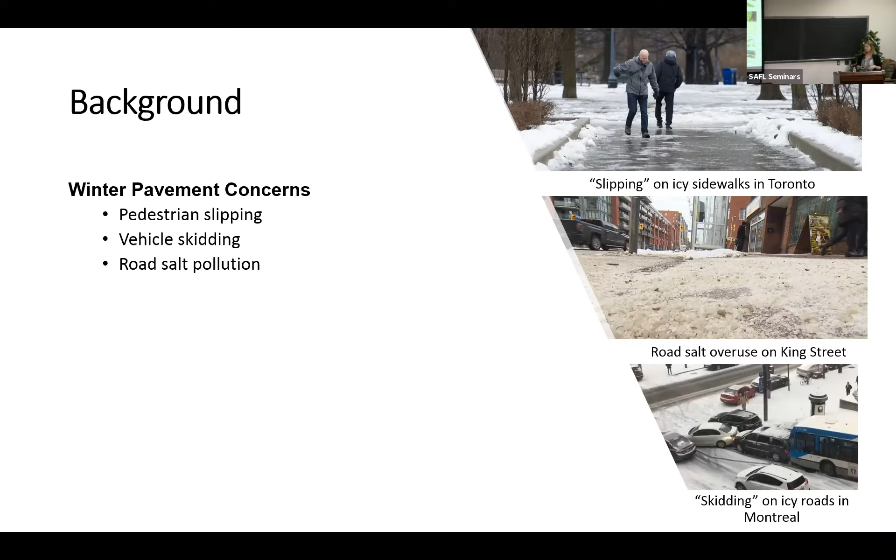The issues that we encounter in the winter all come down basically to the amount of surface friction that we have. In our lab, we have a couple of devices that we can use to measure surface friction. The first one is this called a slip test, or the Mark 3B.

It basically simulates a pedestrian walking, and that angle that your foot hits when you're walking—what's happening is if it's slippery, whoop, you fall. So you can see here the little foot, you adjust the angle, and when you get to the right setting, you actually see it slide, and that would be when the person falls. So you can measure the coefficient of friction.

We also have a SlipAlert, which is by far my favorite toy—it's just a little car. The distance that vehicle travels is going to be a function of the surface friction. So we're simulating in this scenario a vehicle skidding. We have these two devices that we can use on our test pad to measure friction under different winter scenarios.

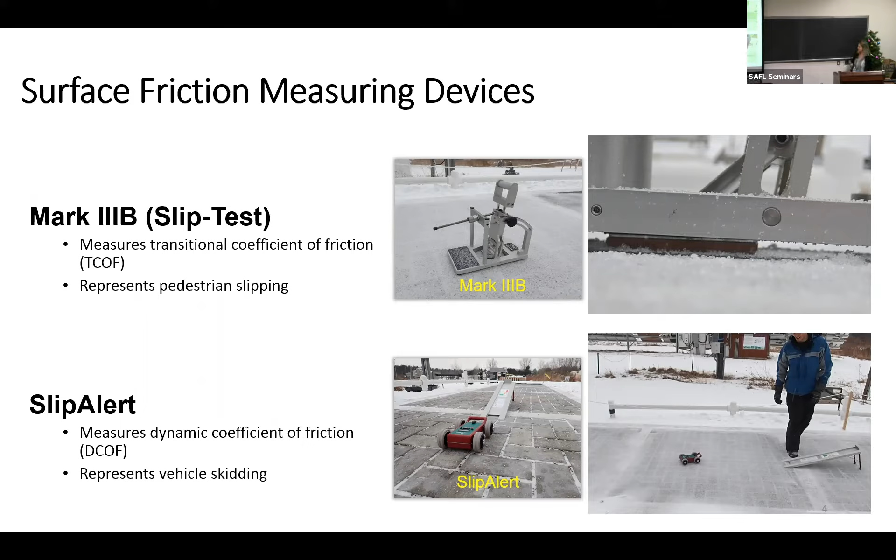Some of you may be familiar with some of these other products. We've tried to work with them in the past. All friction testers are not designed for outdoor applications. They're traditionally meant for testing new types of tile or indoor work environments. So trying to use friction testers outside under snow and ice has been tricky.

The British pendulum is a very common one, but we personally just found it much too time consuming to get it set up when you're outside and it's cold. And then we've also played around with a T2GO friction tester, but ran into issues. This is used often in looking at the friction of airport traffic lanes. But if you have snow, we've run into lots of issues with snow accumulating on those rubber tires, which then was affecting our friction measurements.

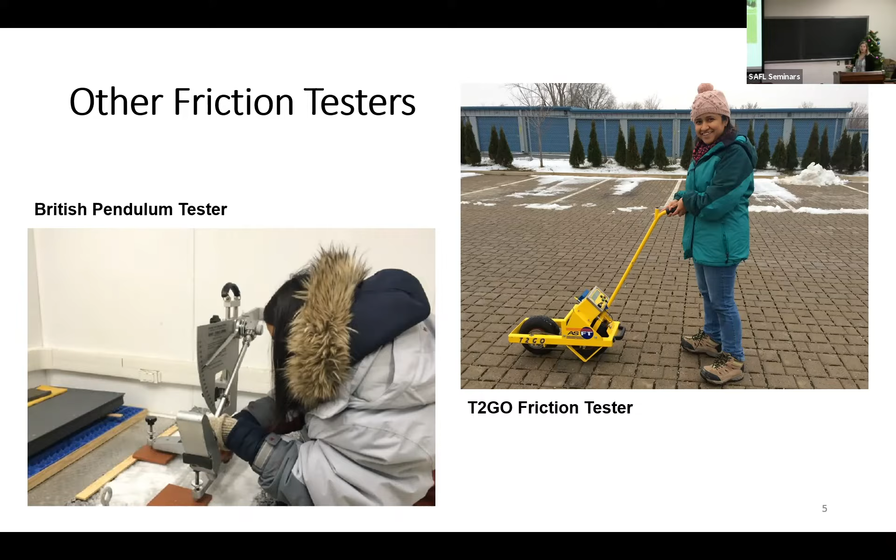Over the past 2 winters, we've been testing or measuring friction on a test pad north of our city, about an hour away, on some permeable pavements. So this is our little research facility. We've got 4 PICP cells that are identical and an asphalt control that's drained by a catch basin.

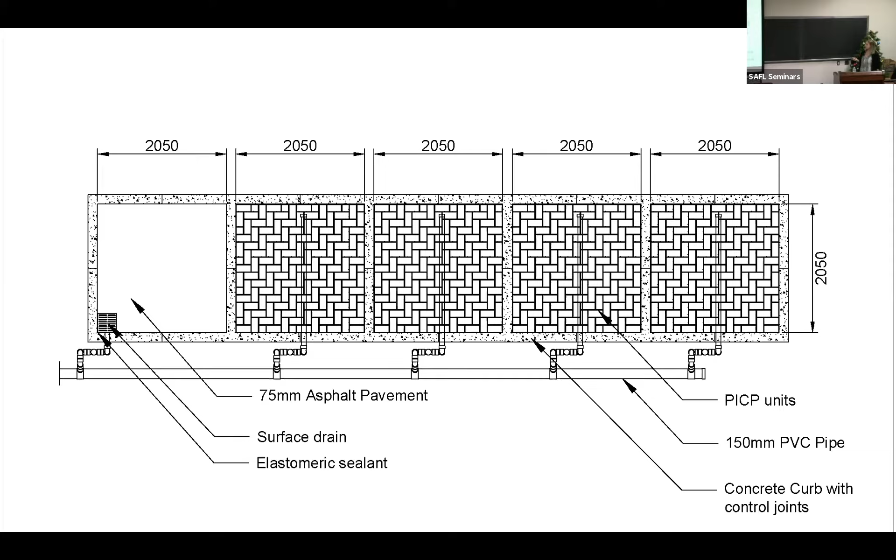The area that we had constructed this has very clay type soils, so they're all partial infiltration systems. They each have their own underdrain. And then we have a U-trap so that we could sample and track conductivity and look at water quality. So here's a picture of the test facility.

We treated, for this study, each surface with road salt. One cell received road salt at a medium application rate, so 10 pounds per 1,000 square feet. One received it at a low amount, so 5 pounds. And then we also did 2 cells where we pre-wetted the road salt with beet juice, which is one of these alternative de-icing products that municipalities are starting to experiment with.

So you can see the main difference here is that coating, you can see the beet juice sort of stuck to it. It makes it a little bit more tackier. It also changes the temperature at which the road salt is going to be effective at. For the asphalt pavement, we used it at the medium road salt application.

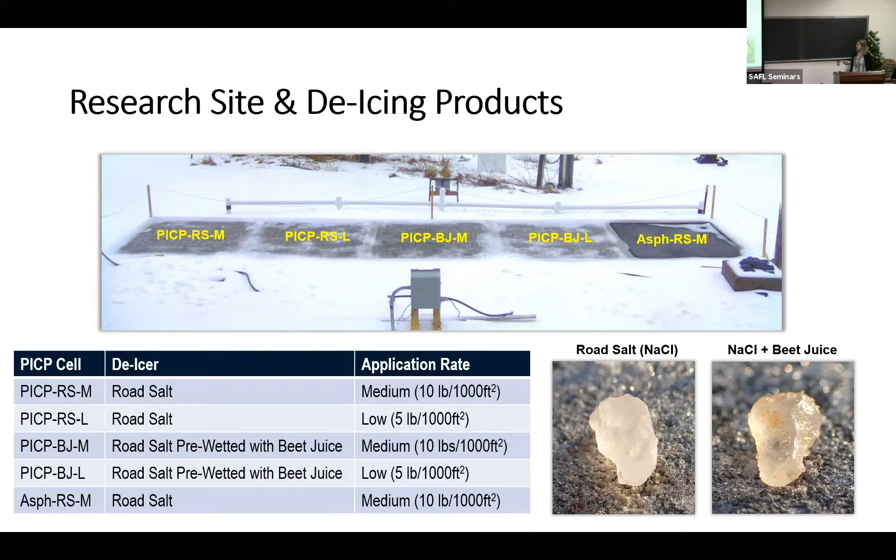At the site, we had a field camera set up that had infrared, so we were able to take pictures both during the day and night, so we could observe when there was ice and snow and water on the pavement surface. We had surface mounted temperature sensors, so we could look at the pavement temperature, both when it was clear or when it's covered in snow. And then we had conductivity loggers installed where we could track conductivity as an indicator of the road salts or the chloride that's in that discharge water coming out either through the catch basin or through the underdrains from the permeable pavements.

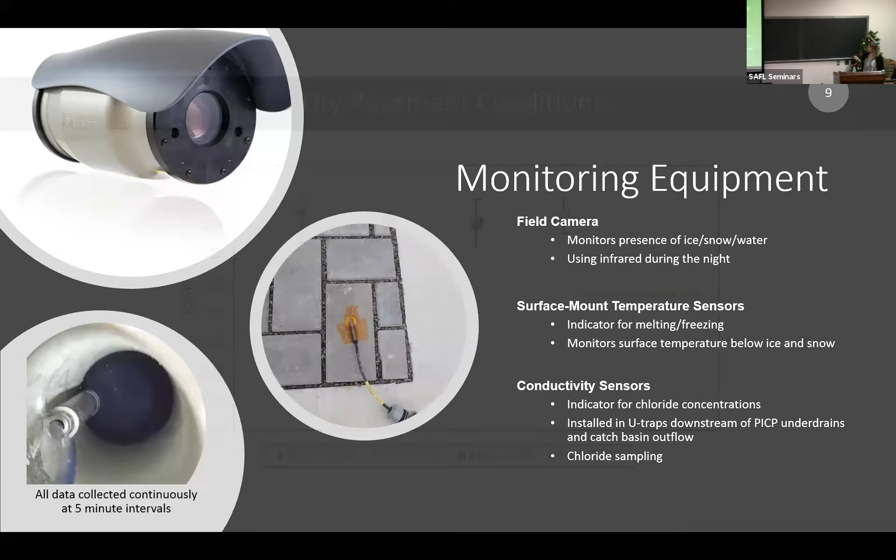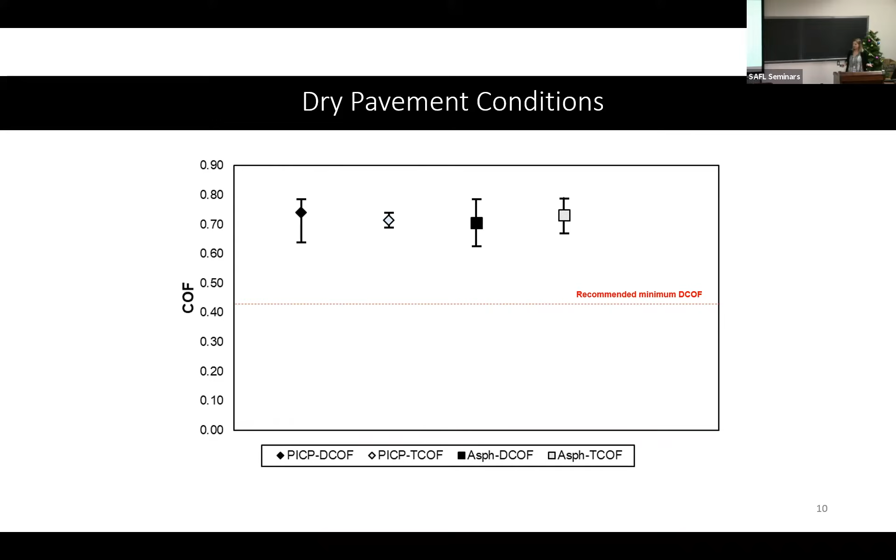To start off, just so that everyone knows, under dry conditions, the PICP and the asphalt basically have the same amount of surface friction. So just showing here, these are our friction measurements with the 2 devices. This is sort of a recommended minimum level. So under dry conditions, you don't have any hazard concerns. There's enough friction, you're not expecting vehicles to be skidding or people to be tripping and falling or slipping.

Over the 2 years, we had a number of events where just because of the timing of the snow and the timing of the weather afterwards, it would snow and we wouldn't actually get out there to shovel or apply de-icing. So we were able to observe what happens just without any snow removal or de-icing practices. And so we had 15 of these melt events. What we would see is consistently melting began and ended sooner on the asphalt.

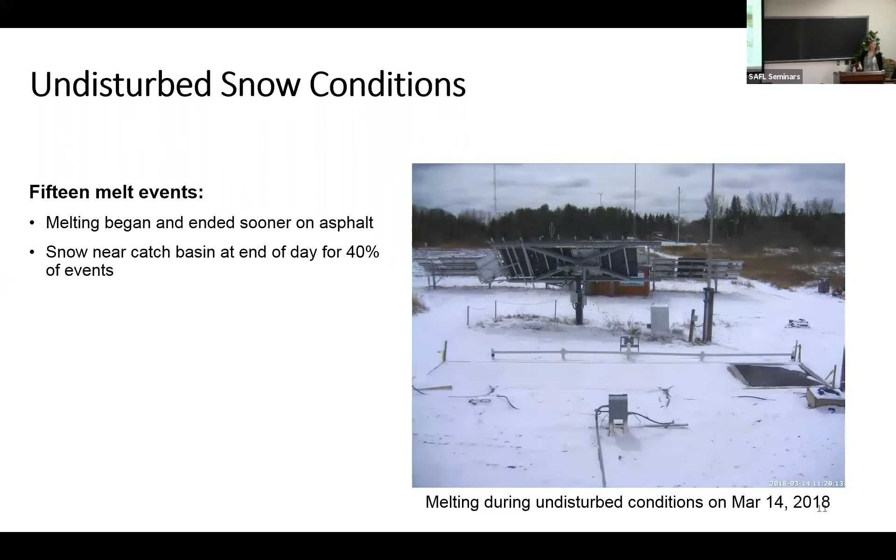This is more of a process due to the different thermal properties. We're comparing a black asphalt to a gray concrete, not actually anything to do with the fact that that pavement is permeable. So if we had had black pavers, we would probably be seeing more similar behavior. But the important thing in terms of parking lot safety or operation safety is that 40% of these melt events would still have snow or ice near the catch basin at the end of the day. And that, from an operator's perspective, is our hazard, because that's where someone's going to slip and get injured.

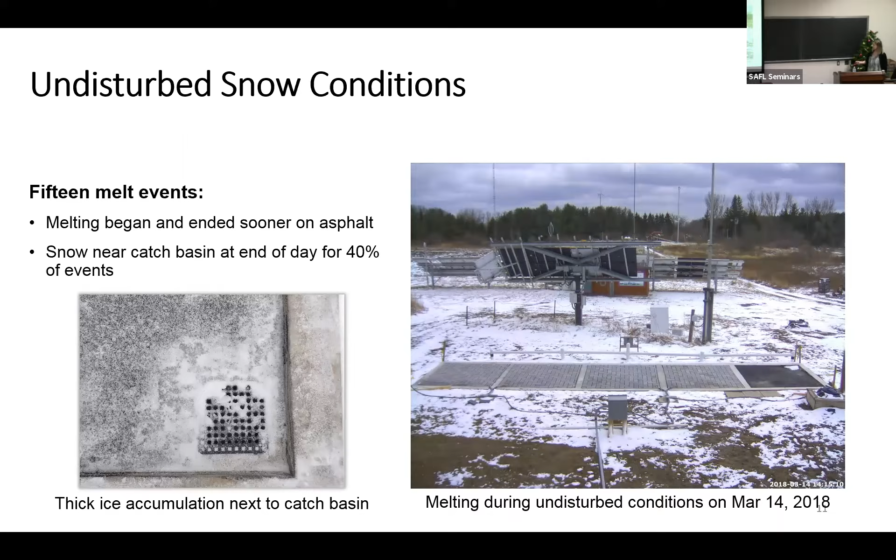And there's a picture of the kind of ice accumulation that we would find sometimes around our catch basin.

We also had a flooding event. Last winter, we had a large freezing rain event, and our asphalt cell actually flooded. Because this is not a full-scale parking lot, we weren't below the frost line in terms of our drainage. So the catch basin and the pipe actually got frozen up entirely with ice, and that drainage pathway for the surface water wasn't available.

You can see here in the middle, that is completely full of water. It's spilling off. You can actually see we still have some patches of dry pavement because water is infiltrating through the PICP. So after this event, the technician and graduate student actually ended up having to install a heat trace, like a heat cable, so that we wouldn't have that happen again on our asphalt.

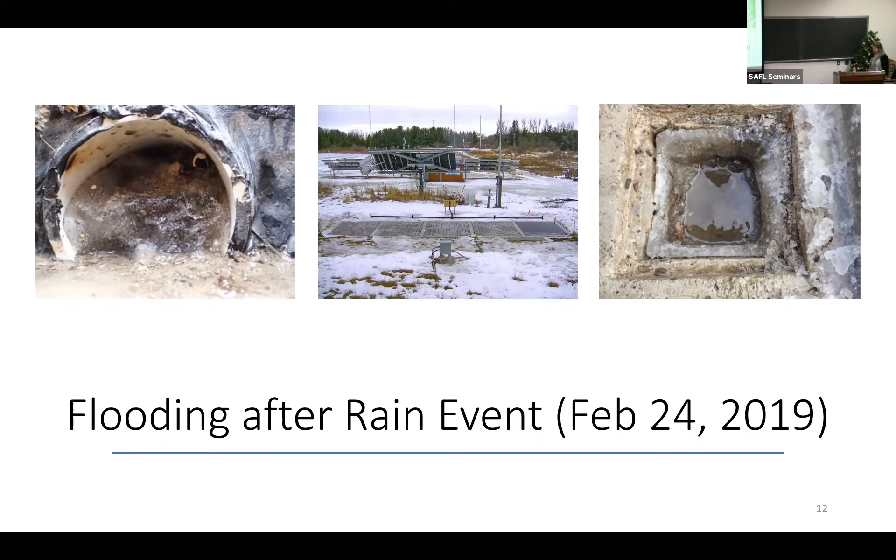So we did a series of shoveled snow experiments. This is trying to simulate a typical parking lot or walkway operation where you would go out, shovel or plow first, and then apply your road salt. We collected friction measurements before salting and immediately after.

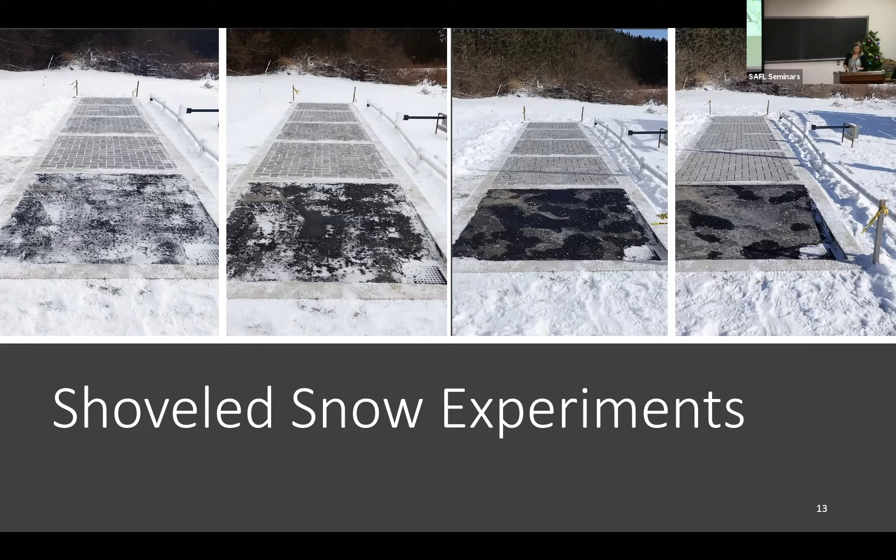We did this for a number of 6 different events. What we observed is that when we would go out and just do the measurement before salting, so we've shoveled but before applying the road salt, the asphalt would have a higher level of friction, but it would still be below recommended levels, so it was still a slippery surface. Then very soon after the application of road salt, you would see friction levels on the PICP change quite drastically and become more in line with the asphalt, and in some cases even surpass the friction levels on the asphalt as that water melted and drained.

We noticed too, you get different results depending on the system or device we're using. This is a spot measurement, so we would have much more range and variability, because if your measurement happened to be on a patch of dry pavement or a patch of icy pavement, you either get a very high or very low friction level. Whereas the vehicle is giving us a more overall perspective of the surface.

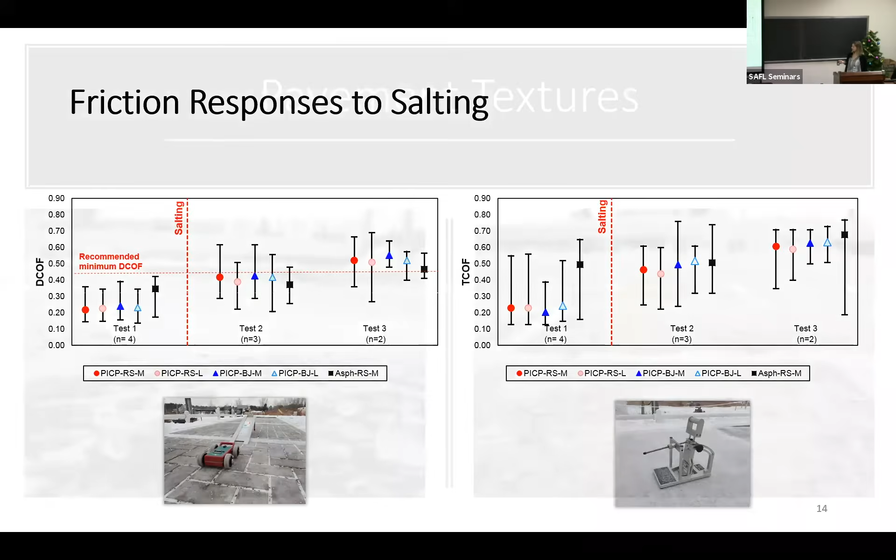This pre-salting issue, again, I would argue is more a function of the pavement, not the fact that it's permeable. As you can see in the image here, the asphalt is a poured product, and it has a more rugged surface as opposed to the interlocking pavers, which are modules that are quite smooth. So I suspect that had we been working with a different type of permeable pavement that was poured as well, like pervious concrete or porous asphalt, we might not see that difference. This is just a fact that we're comparing pavers to asphalt, not a function of the fact that they're permeable.

We also observed that the melting, or dissolving processes taking place were quite different on the permeable and impermeable surface. On our PICP, we would often see full granules of road salt left after the event, because the water melts and drains, so there isn't that moisture on the surface to fully dissolve the entire granule of salt. In contrast, on the asphalt, where basically everything has to melt and build up so that it can do overland flow, you would end up with a completely wetted surface, and then a portion of that water ultimately evaporating.

And so we would find the salt, you can see the drainage paths here, would precipitate out and then be left as almost like a powdery surface that would even sometimes act as an anti-icing behavior, melting snow the next time it occurred.

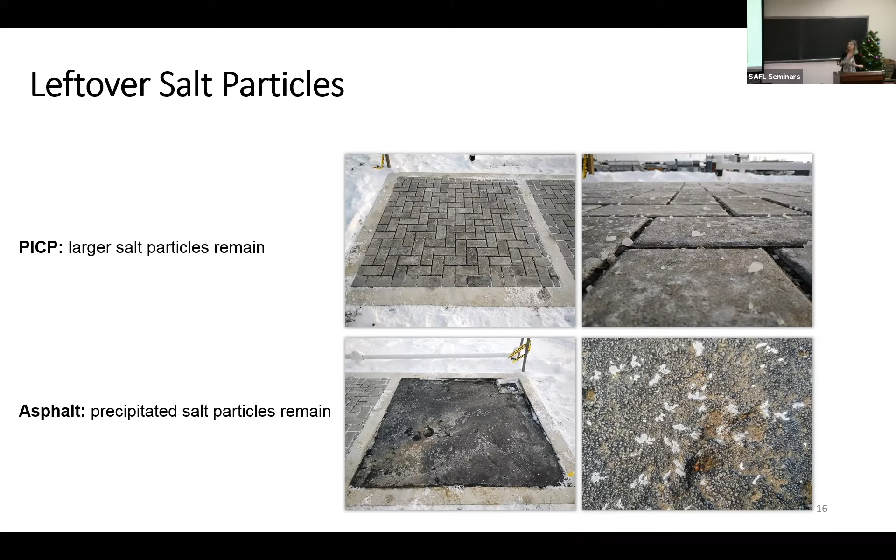So what this says to us is that there's probably some opportunity to look at how we customize road salt for permeable pavement applications. Particularly, we're wondering if maybe we move to a finer or smaller grain size distribution that might allow us to use less salt but still have the same levels of service. Also, if we switch to brine-based products, doing anti-icing or something in liquid form, that again may allow us to have the same level of safety while using less material in the first place.

In our second winter, we switched from just shoveling to actually doing some ice cover experiments. So it started to occur to us as we were doing the shoveling that, more often than not, when you have a parking lot or a walkway, what actually happens is someone drives on it or someone walks on it before it gets shoveled, before it gets plowed. And that walking or driving process, the compression melts the snow temporarily, and then it refreezes in a dense ice cover.

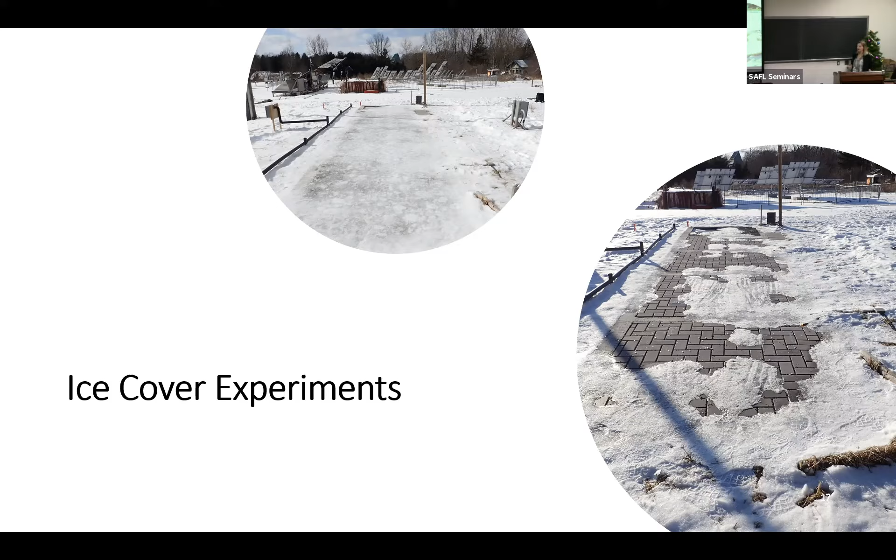So what we did is our students went out, didn't shovel, and they just walked on it back and forth, back and forth, till we got it all kind of liquidy, and then we left it overnight to refreeze. So we did this a couple of times, and then we went back and put on the salt now that we had this really thick level of ice. And this is probably the most successful ice experiment that we were able to execute.

And it gets really interesting to see how these different surfaces behave. So if we look over here in the corner, here we go again. Before we put down the road salt, they're all very slippery surfaces, not safe surfaces. And then, this was about 20 minutes after, we haven't seen a huge impact. But as we move further and further away, we start to see friction levels growing as the water or ice is melting and draining.

So by the time we got to the end of the day here, you can see that we actually had some of our PICP surfaces, the ones that had the medium level of road salt, were now above recommended minimum levels. Asphalt is also improving in both scenarios. But when we hit sunset, that's what this blue line is here, asphalt started to lose friction.

And what was happening is that there was water that had melted and wetted, but was not able to drain. And when temperatures dropped, once we reached the end of the day, it refroze as black ice. So you can see it here, right? You've got bare pavement, but the water here has no way to exit because it can't get over this part that hasn't melted yet to the catch basin, which is mostly blocked with ice as well.

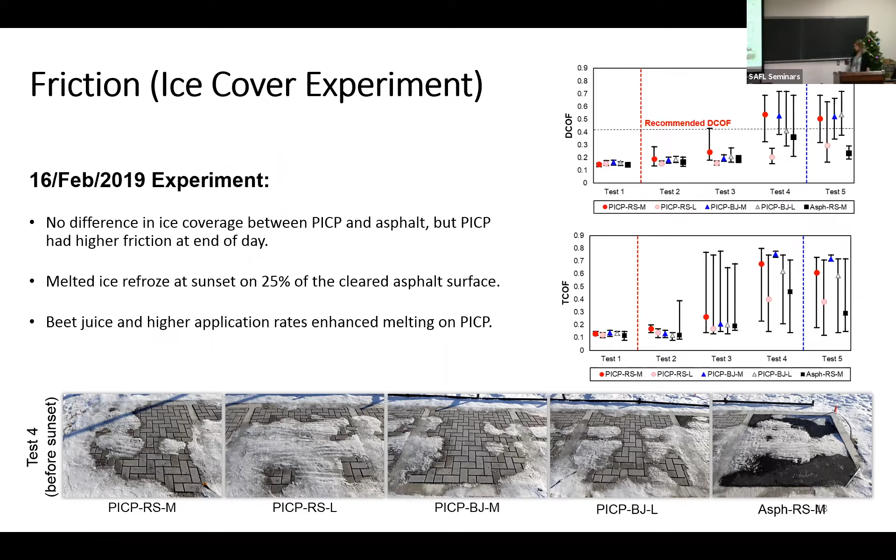Here's the picture again, just from this ice event in February. And then this is the black ice that we saw happening at the end of the day. You can see this is the light, it's just around sunset.

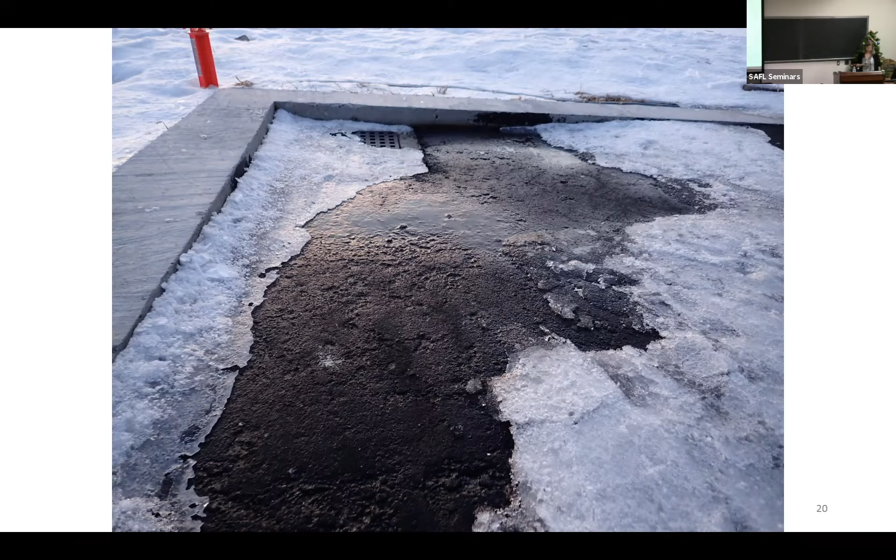So we also tracked water quality coming out of this. I just put it in salinity as a general indicator of the amount of material. Unfortunately, we weren't able to measure flows, so we can't quite put it to a mass balance or anything like this. But what we can see is that when we were applying salt in January and February, levels were very high in our asphalt.

Whereas we didn't start seeing a rise in salinity from the PICP until we started moving into March, when we were getting sustained thaw. And even when we did, we were well down. And just to remind everyone, I think 30 PSU is what seawater is. So we're halfway to seawater. And this is Southern Ontario, pretty much the weakest winters you can almost get in Canada.

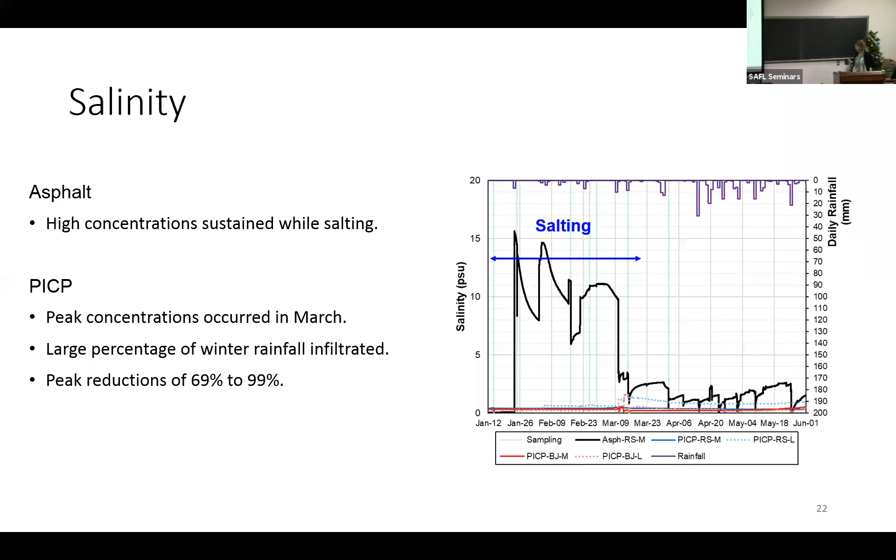So where's the salt going? Our conductivity measurements also give us temperature, and this can help us have a clue in terms of where the discharge is going. If you look at the black lines here, when you see these spikes, that's because we're having a flow event. There's some kind of stormwater runoff that's a new temperature coming through those traps.

So we can see both in the winter, these drops of cold water coming in, and then as we move into the spring, discharge coming out. You don't see that same kind of characteristic. And when we would go out and sample, a lot of the time we wouldn't see much water in our traps from our PICP.

So what we actually think was happening at this location is a lot of the water was draining into those clayey soils. This is not the first time that's happened to us at this property. We do our infiltration measurements, we can't get any water to drain, we build our PICP or pervious concrete, and there's a lot less water coming out of those drains than we expect. So water is finding a way into the subsurface system.

So that is something to think about, because the salt that we are putting down is moving into both the groundwater and the surface water system. I'm not going to debate which is more environmentally harmful. My takeaway is we just need to use less, because they're ultimately one system anyways. So it's going to get everywhere.

We've also had the opportunity to measure conductivity and chloride from an operational permeable pavement parking lot. So I'm going to switch to this site. This is a demo parking lot in the city of St. Catharines, which is about 20 minutes from Niagara Falls. It's in wine country in Ontario, an hour and a half from Toronto if there was nobody on the freeway.

They built a porous asphalt, pervious concrete, PICP, and then an asphalt control. It's where they keep their fleet and their engineering staff. The nice thing about this location, these were all set up as a zero exfiltration system because they were concerned about the stormwater infiltrating. So they put membranes at the base, and each of the pavements has its own drain and its own monitoring manhole, so you can look at the discharge in isolation.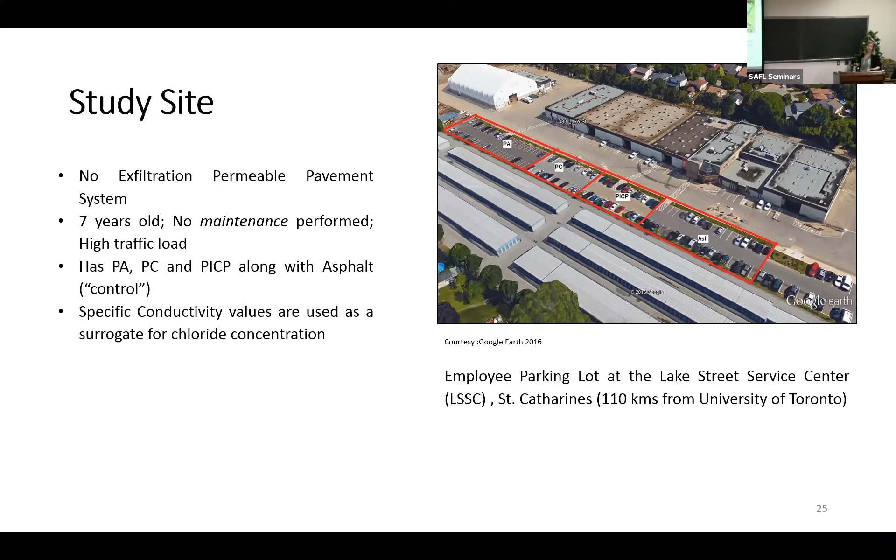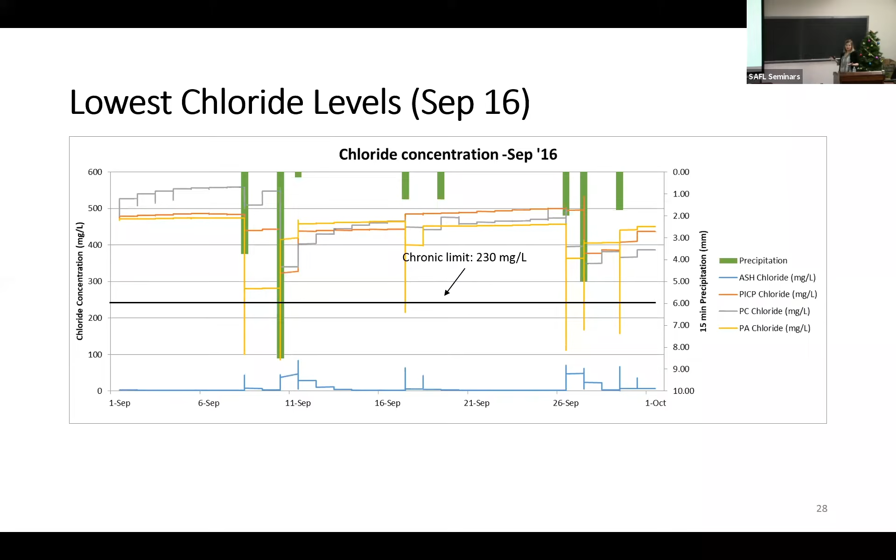Over about 2 years, we did a number of samplings, so we were able to develop very nice conductivity chloride relationships and calculate chloride from our continuous conductivity data. I'm going to start in the fall of 2016. This was when we would see from the PICP probably the lowest chloride levels. You'll note that they're actually above the EPA's chronic exposure levels. So they have higher concentrations coming out in the summer and in the fall.

But as we move into the winter season, the blue is the runoff from the asphalt, an impervious parking lot, and all the other colors down here. You do see elevated discharge, but we're talking orders of magnitude smaller. Now this is a zero exfiltration system, so there's no actual removal of chloride taking place. Chloride is going to move through, but in a very different pattern than on the asphalt. It's being detained and attenuated.

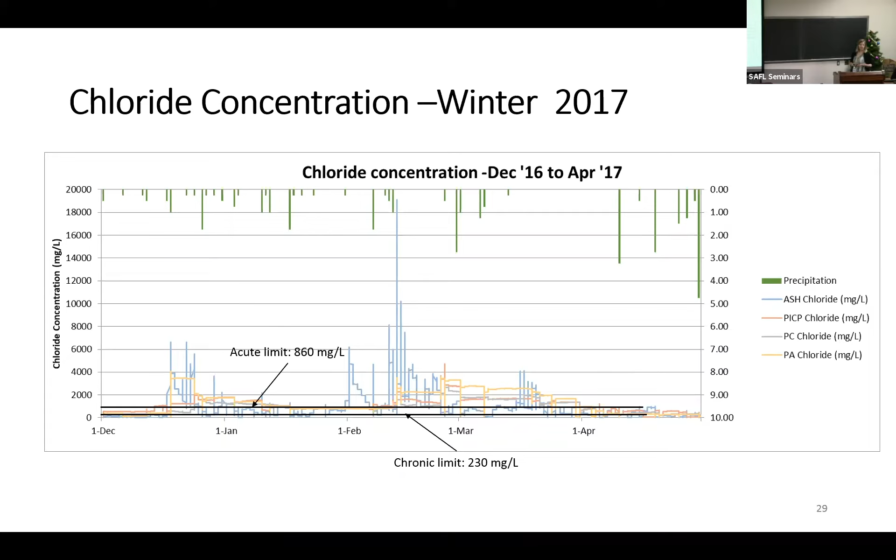So what we're doing is eliminating these extremely high discharge shocks in the winter and replacing them with higher levels at other times of the year. So the next question for us as researchers is, is this a good thing? I'm not sure yet, but potentially it is. Winter's a low flow time of year. Species at risk might not be as able to deal with this sort of exposure, and perhaps releasing the same material at a different time of year may mitigate some of the negative implications. It's certainly something we need to look at more closely.

Just to wrap up the year, we can see into the spring. As we move away from that winter, the levels in the asphalt come back down more in line. And in fact, towards the end, we did finally drop below the chronic level in some of our asphalts. But it certainly is interesting.

So the takeaway, what have we learned from these past few years of looking at permeable pavements in the winter? Number one, if they're dry, they are both going to give you an equivalent level of safety from a pedestrian or a vehicle's perspective.

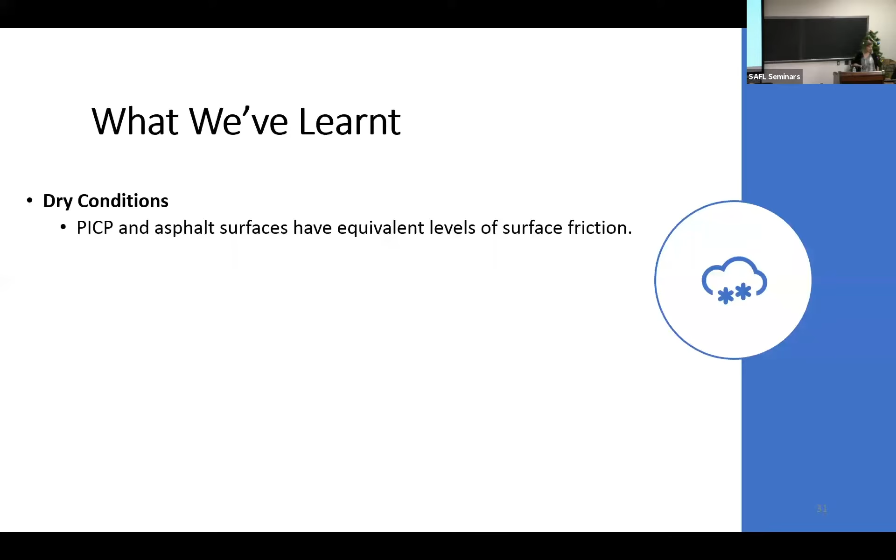Shoveled snow followed by de-icing. The PICP surfaces have a lower surface friction than the asphalt. But when both treated with a medium level of road salt, they provide similar levels of safety soon after the snow begins to melt. And this difference in surface friction is more a product of their thermal properties, not impermeable versus permeable.

The PICP treated with the reduced road salt provided similar friction levels as the PICP treated with the medium level, so demonstrating that we can reduce our road salt use rates without sacrificing safety. And under these conditions, the addition of the beet juice did not provide any additional benefit.

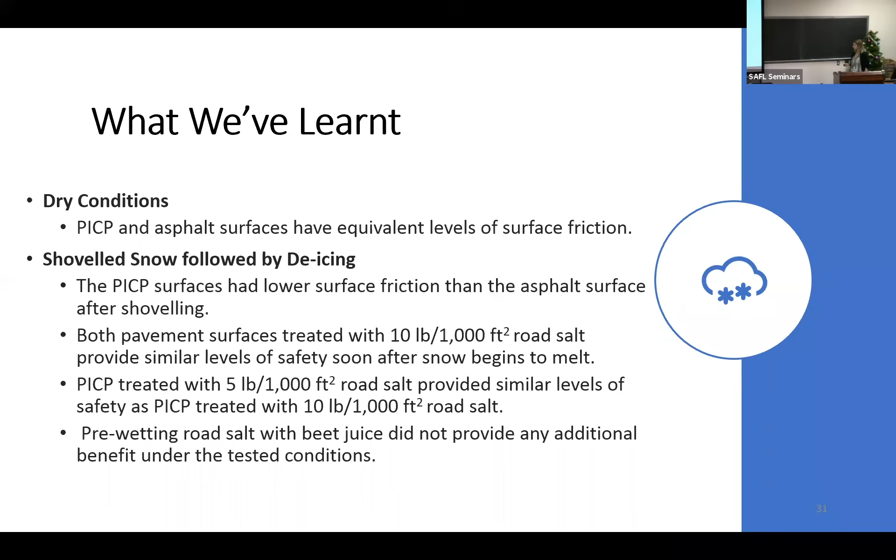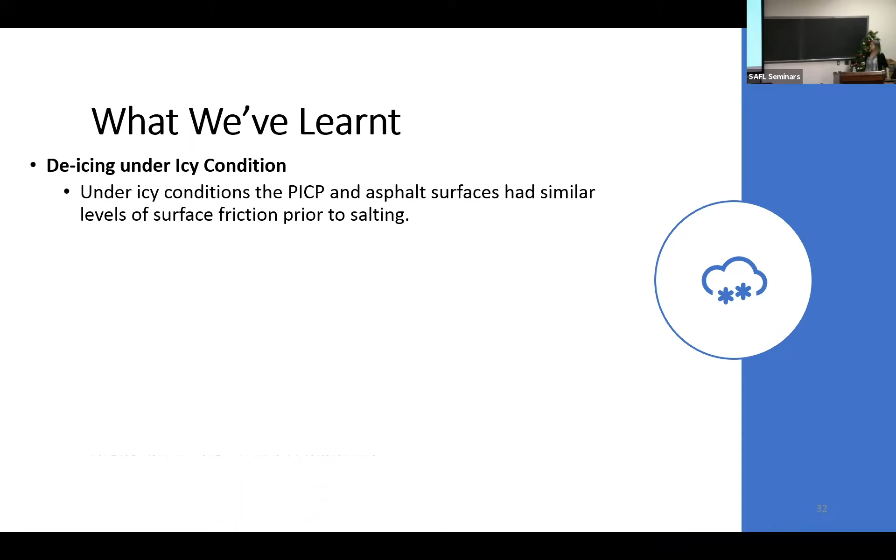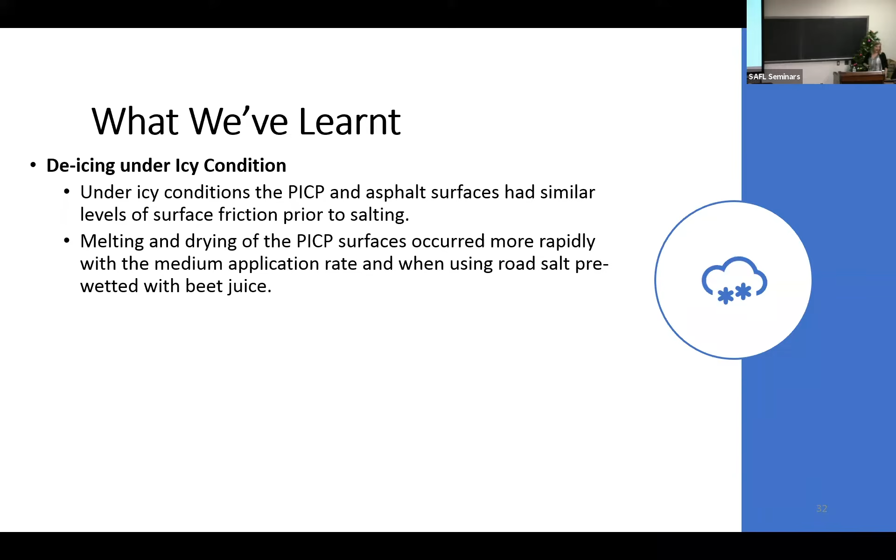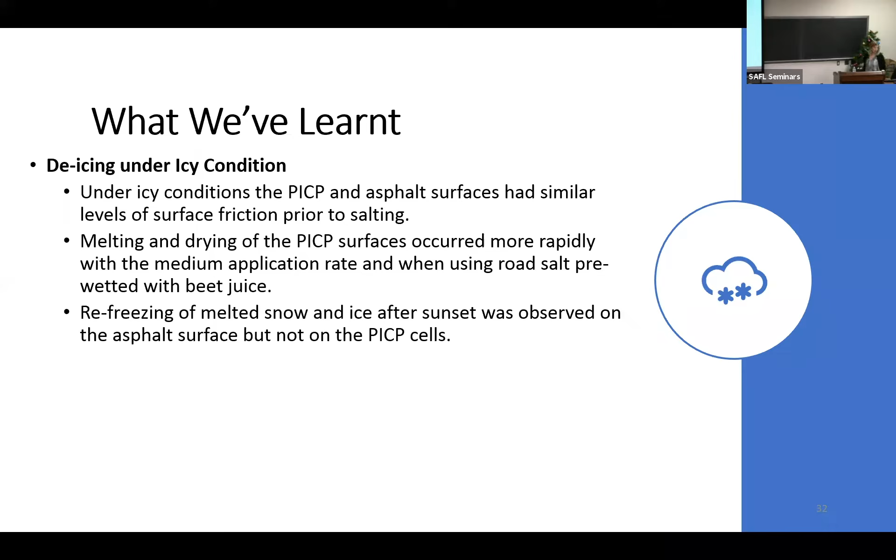De-icing under icy conditions. First of all, we didn't see a difference; they were both very slippery because they were both covered in ice. So it doesn't matter what surface is beneath, it's ice. People are going to slip. The melting and drying occurred more rapidly on the PICP surfaces with the medium application rates and when pre-wetted with beet juice. Refreezing of melted snow and ice was an issue observed on the asphalt, creating black ice conditions.

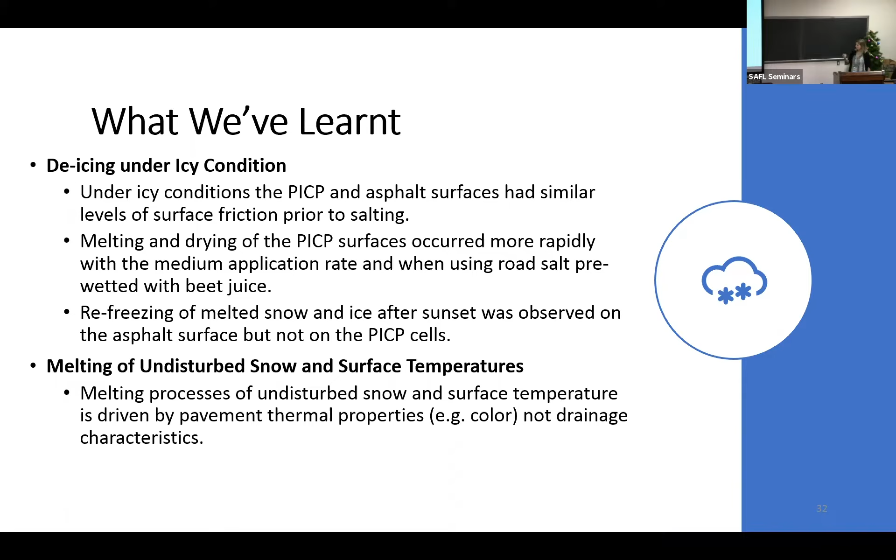And under undisturbed snow events, the melting process occurs, again, driven by thermal properties, color on the asphalt. Despite this, we would still often see meltwater that could potentially refreeze as black ice at the end of the day.

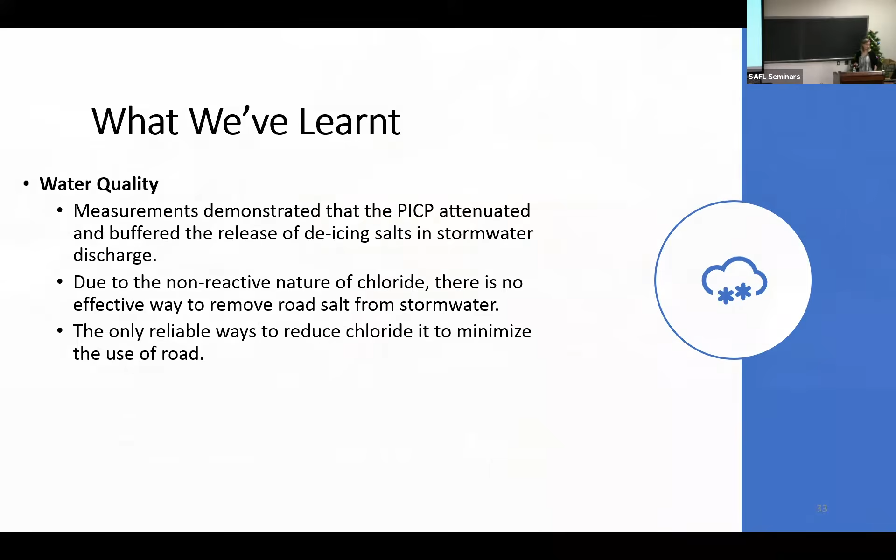So what's next? As I sort of alluded to earlier, I think there's real opportunity for us to start looking at anti-icing practices, particularly on permeable pavements. So we'll see. I'd love to be doing this in another year or two.